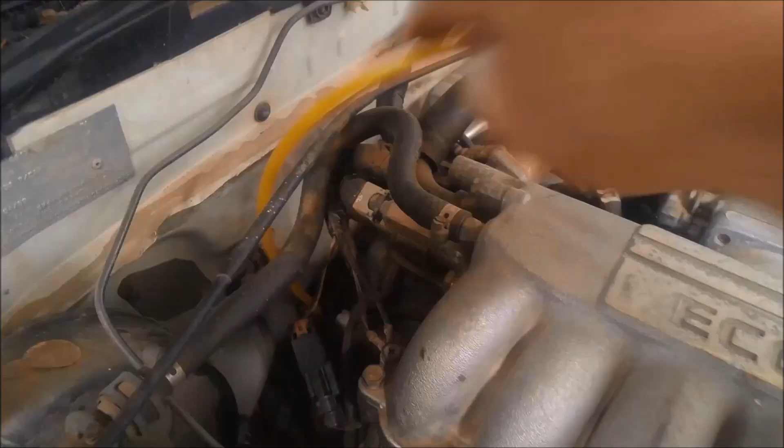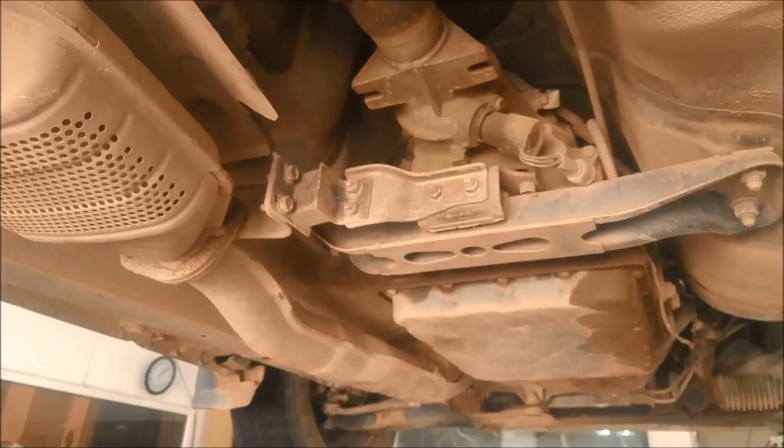So we've just checked all the basics, checked the fluid level, taken it for a run. We'll just suck the fluid out of it. Makes it a little less messy there. Now's a good time to just double check, make sure there are no oil leaks or anything like that. The way you tell if there's a flow of oil there, it'll actually clean a little area wherever it's leaking. You can see it's been weeping oil here somewhere, but it doesn't appear to have any obvious oil leaks.

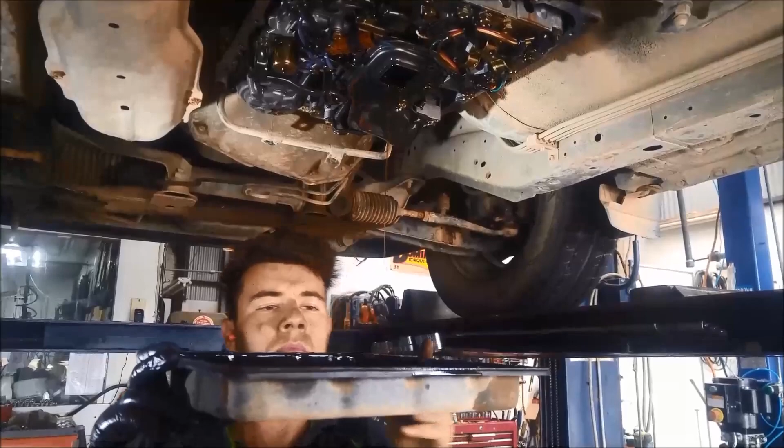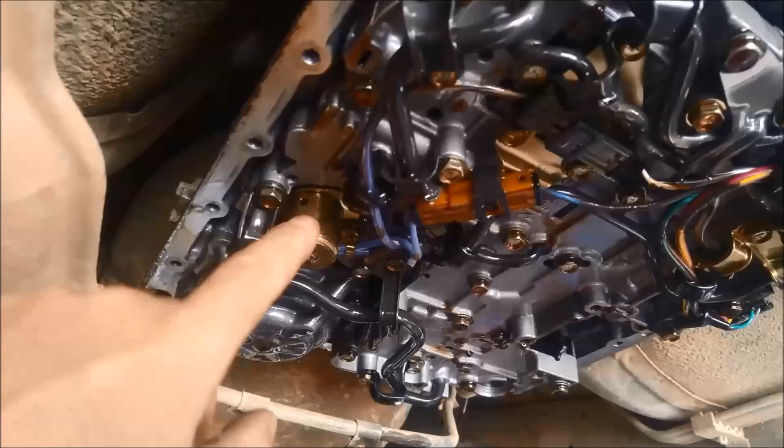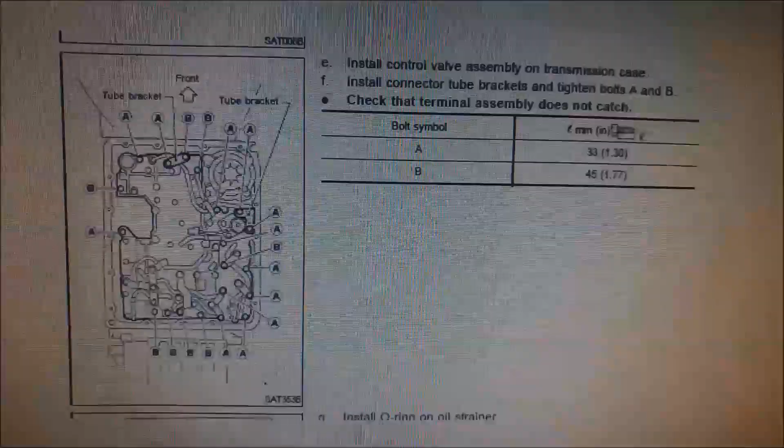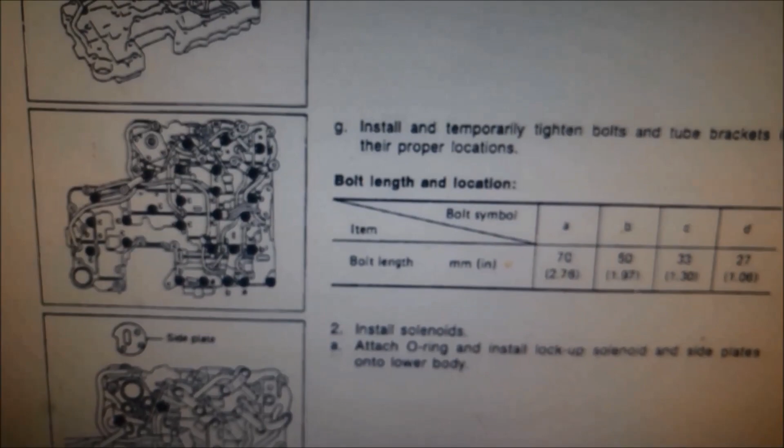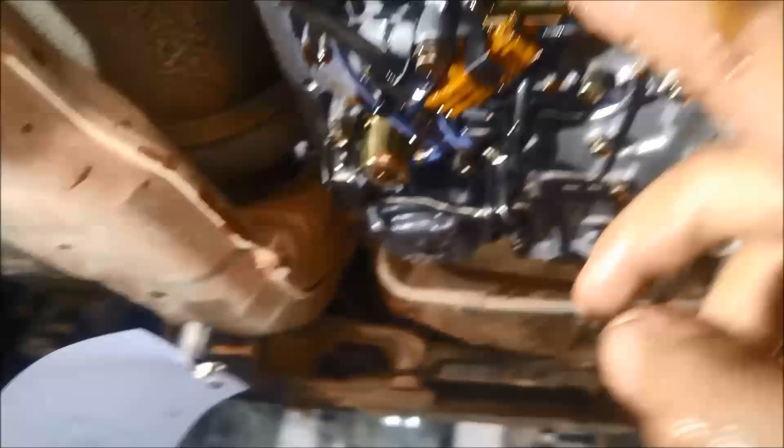Loosen all the bolts as per that diagram, and the way you test it, if I wriggle that valve body up and down, you can see which bolts are not moving up with the valve body. And now we'll just take those bolts out. Well, first we'll unclip these electrical connectors and then we can drop it down. Nice one.

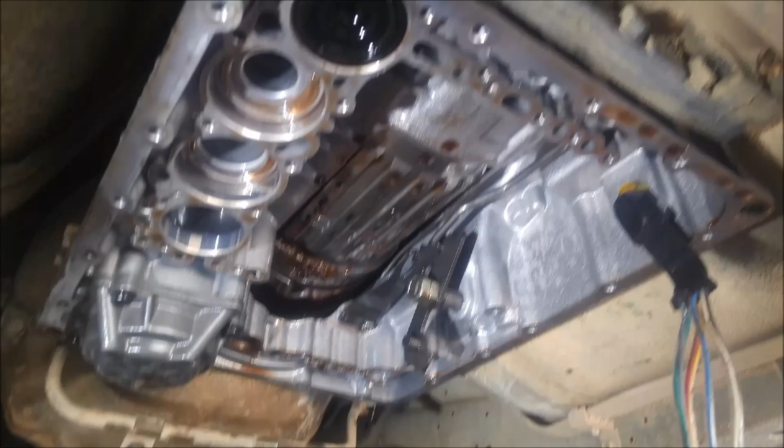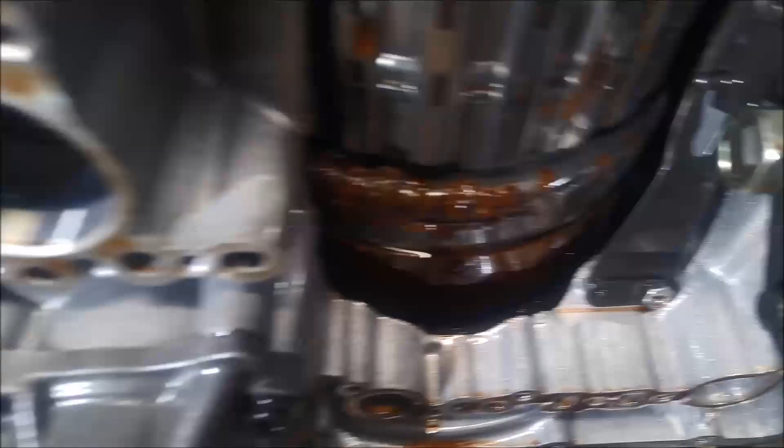Now, as you pull them down, you'll notice we've got these accumulator springs. You've got the front one, then you've got the big one in the middle, and the medium sized heavy spring at the rear. Now while you've got the valve body off, you can do an air pressure test on the clutch packs. You can see this one must have been sitting for a while, and it's got a fair bit of rust on there. That's quite heavy rust, not surface rust, that's actual rust.

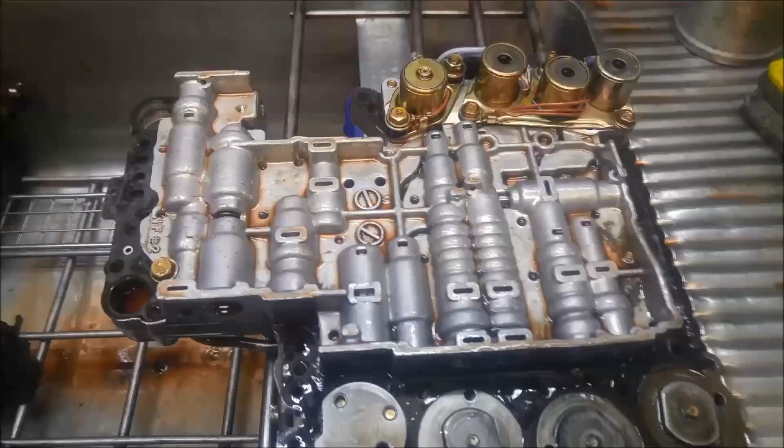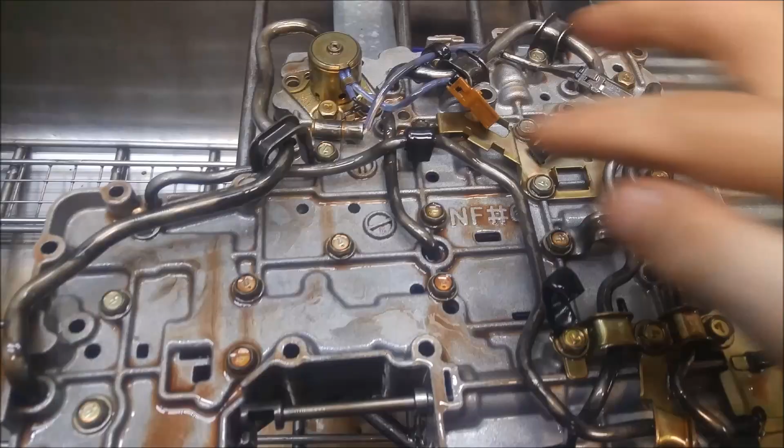So we've got the valve body out, and you can see there's quite a bit of fine metal accumulated there on the top of the valve body. There's the solenoid block. So we've got the overrun solenoid, solenoid A, solenoid B, and the pressure control solenoid. And this one on the bottom side of the valve body, that one's the torque converter clutch solenoid. And we've also got a little temperature sensor here as well.

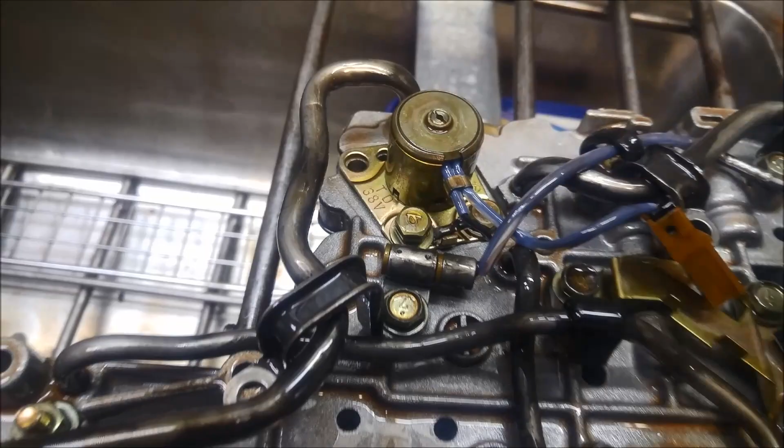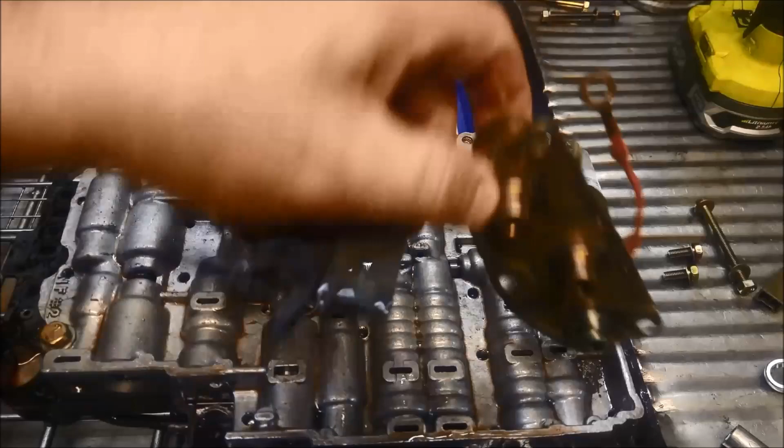The gasket got stuck on the case there when we were taking it out, so we're going to have to actually open this one up and replace that gasket. I'm not sure what that accumulator does there, but you're definitely going to lose a little bit of pressure if you don't replace that, so be aware of that. Always a good idea to check the gasket hasn't got a split or a crack or a broken bit out of it. So I've undone the bolts off the solenoid block, and that just comes away like that. Another bolt on that bracket. There it is there. Now I'm just going to replace that gasket there.

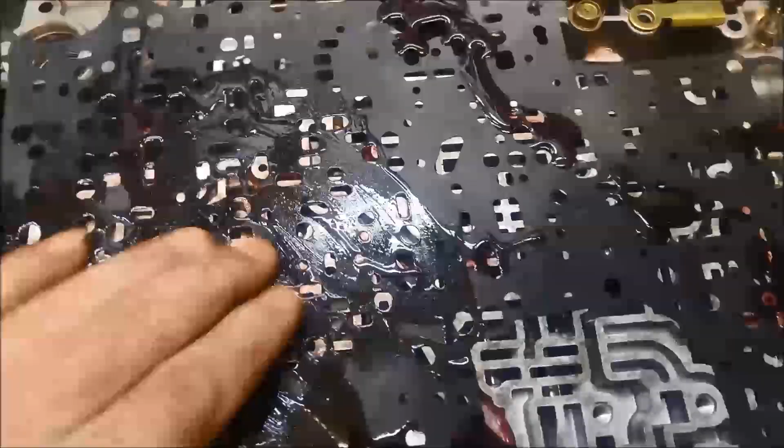Okay, valve body's nice and clean. Check the valves. Make sure you put all the check balls in. There are 9 check balls in these. And I like to smear transmission fluid on the gasket just so it doesn't stick to the valve body before you put it on. Make sure you do both sides. Now we can put the lower half on there and bolt it up.

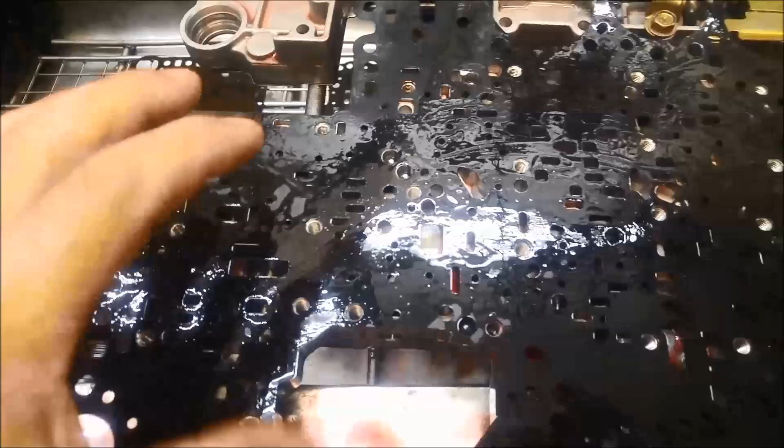One little trick I've learnt, sometimes these valve body gaskets will be larger than the holes. What you can do is just put it in the microwave for a minute. Don't overcook it, you'll burn it, but it will take the moisture out of it and contract it a little bit, especially if the bolt holes and the port holes aren't lined up. The lower half's back on. Now I can just flip it over and we can put our new solenoid pack in.

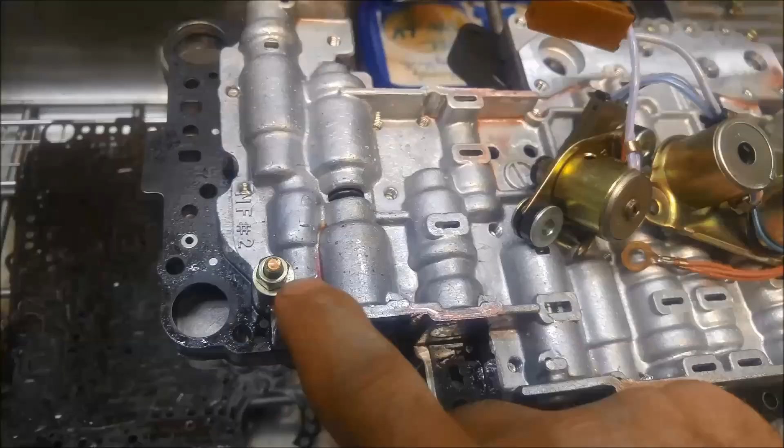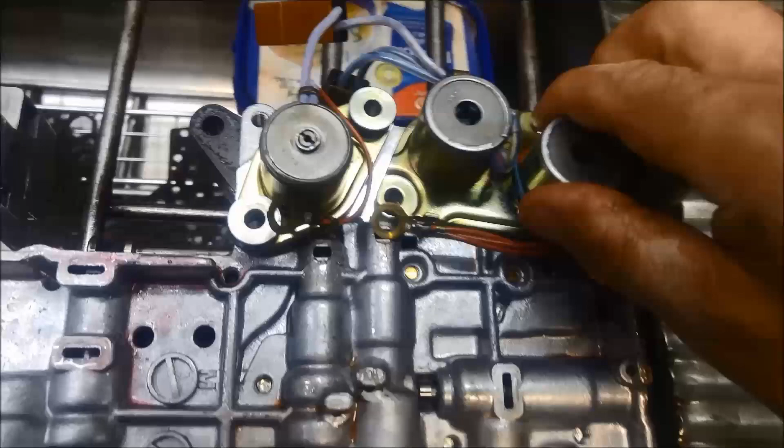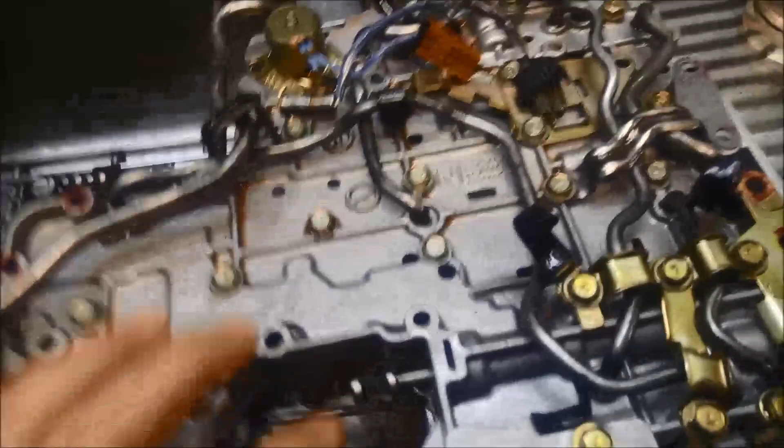Now these 2 bolts, one there and one on the opposite side, they actually align everything. So make sure you keep everything loose until you get these in, and then it should align all the holes, bolts and whatever else. You don't just force it in, just wiggle those seals in. Like that. Make sure your earth strap's bolted down. And also don't forget to line up the selector when you're putting it in.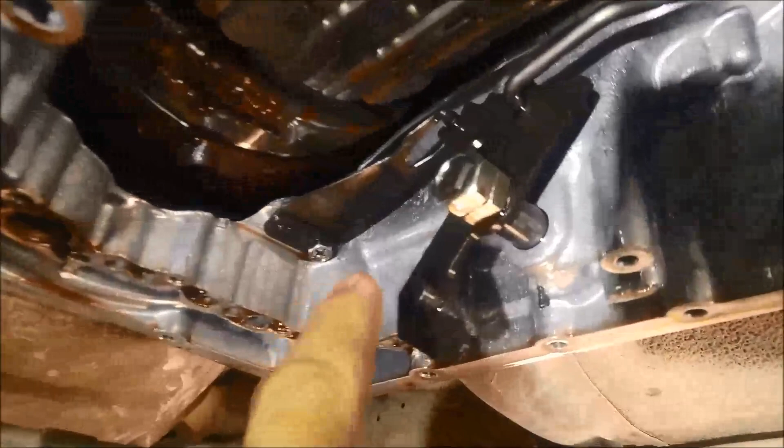I've torqued up the top part of the valve body because we can't get access to the bolts from underneath. Now you want to make sure that the manual shaft is aligned with this. And I'm lucky I've got a helper here. I'll be able to tuck those accumulator springs in there while I'm getting the valve body up. It's very difficult to do, especially on your own, because you've got to align it up evenly.

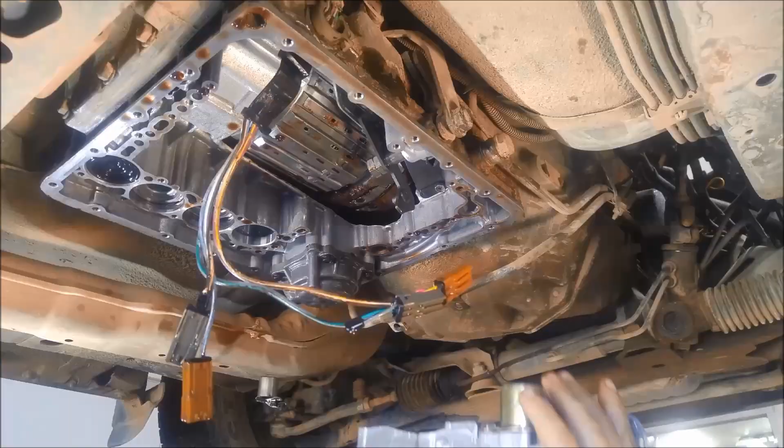Alright, just put it up into place, position. You lined that up. Yep, just lower it down. I've just got to put those springs up. Just sort of twist it like that. You're holding it? Yeah. Just got to go down evenly. Like that, not that much. I'm not moving around because the spring will fall. Yeah, holding it.

Righto, you can just line up that shaft. I've got the springs in. Yeah. That's it. You're holding it? Yeah.

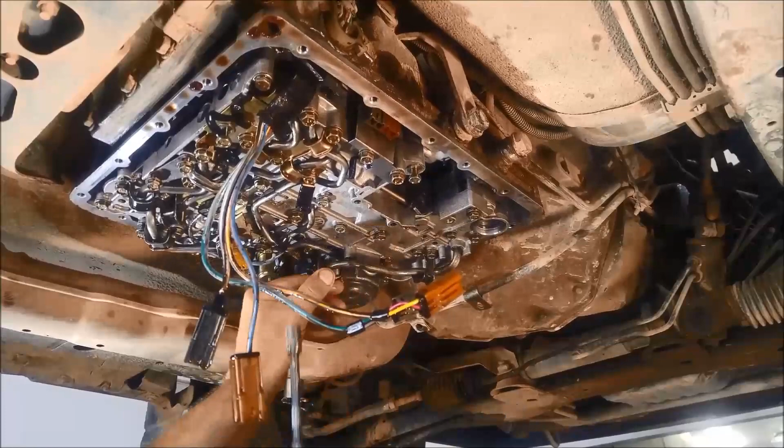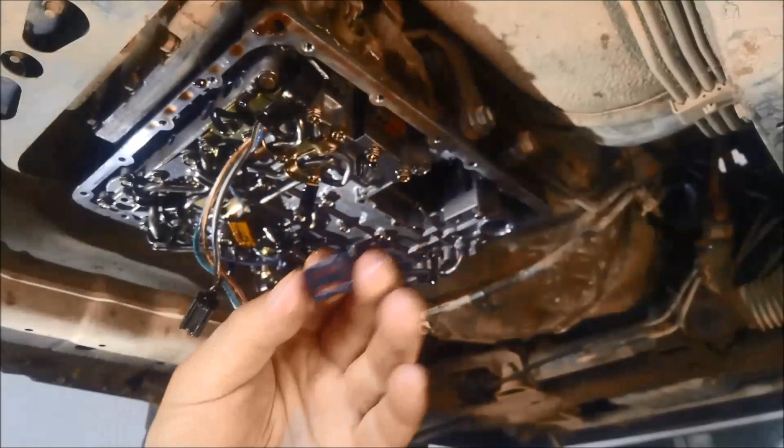Filter goes on that one. Tighten that one up afterwards. And we just torque it up with the tension wrench as per manufacturer's tension specs. Okay, now we can put the clips back in. Got these little clips. They just go over the top of the connector there.

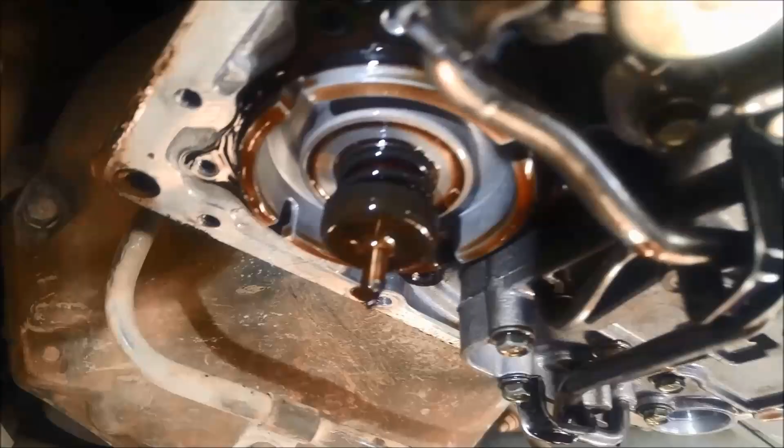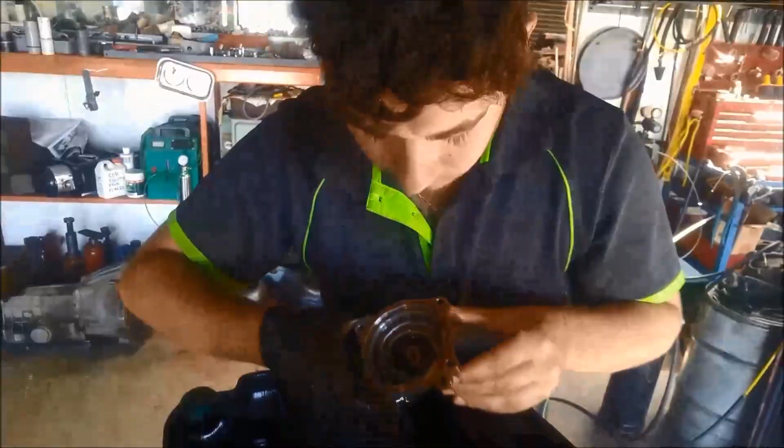And we're just going to remove this cover just so we can clean any muck out of it that might have accumulated. Pull that out. And you can see why it's a good idea to remove that cover, just to wash out or clean out all that muck that's accumulated in there.

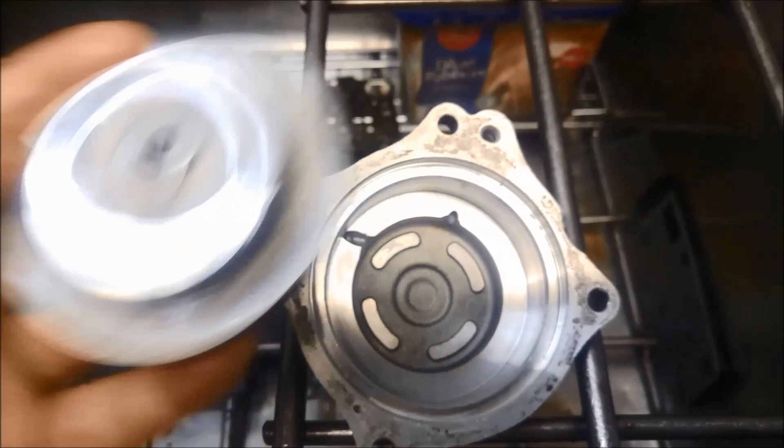So the cover and that top piston, or bottom piston actually, how it sits, nice and clean. And it's a good idea to just smear a bit of oil on there when you're putting it in. That O-ring doesn't look too bad.

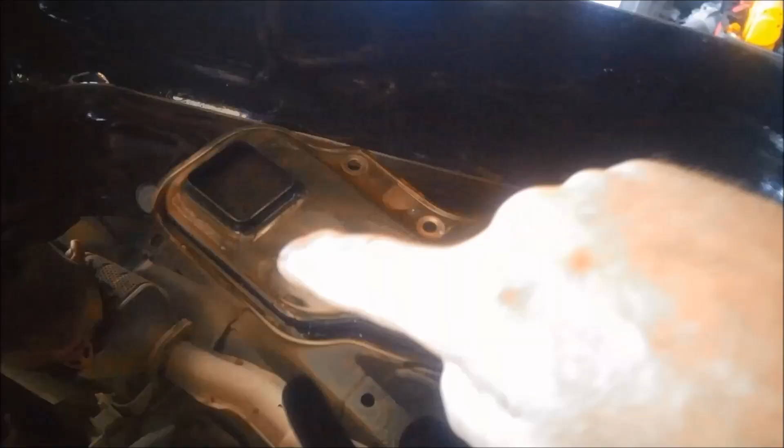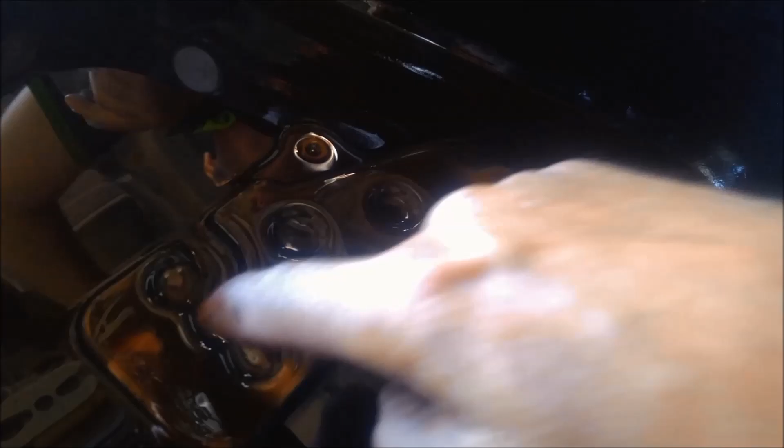Now you can see the snorkel on the filter on these is pretty short, and also the different filters have different numbers of dimples in them. So it's a good idea to compare it, and also don't forget to put your O-ring on the new filter there.

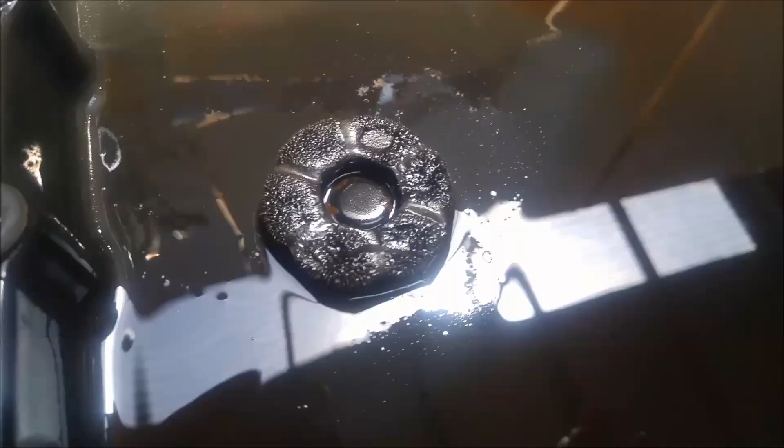You can see how much muck was on that magnet. So the magnet's thoroughly covered. You can see how much fine metal's there, and that wouldn't have been working anymore, so all that muck would have been attracted to the solenoids. One, it contaminates the solenoid. Two, it's suspended in the transmission fluid, and it's almost like liquid sandpaper, if you can imagine that floating through the rest of the transmission.

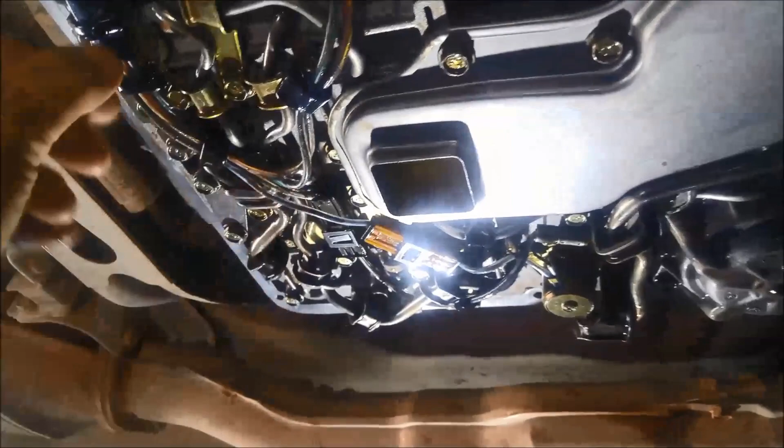So make sure you actually remove the pan, clean the magnet, clean the pan, add magnets if you can, replace the filter, instead of just changing the oil in a transmission service. Filter's back on, everything's back in. Just make sure all these little clips are holding the cables nice and snug. All the clips are in. Double check your work. Make sure your cover, if you've removed the cover there, that you've nipped it back up.

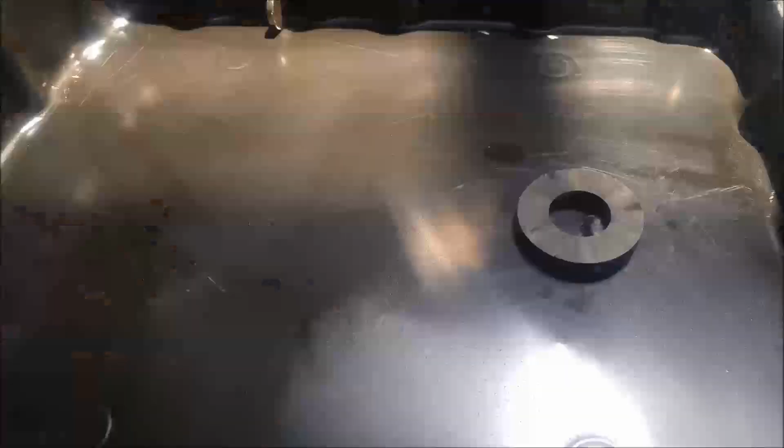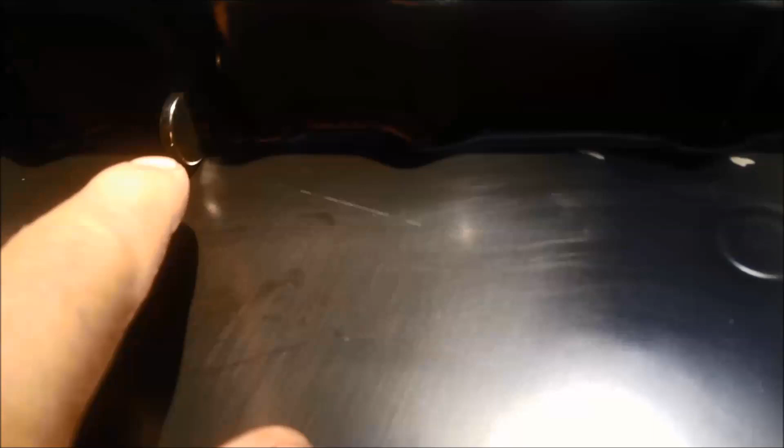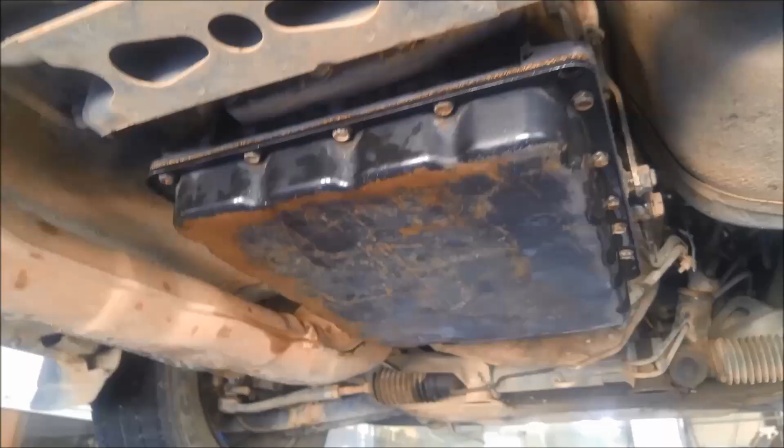We're going to leave the magnet up on that little bump there, just so it can work top and bottom. More of the magnet exposed to the fluid will keep it much cleaner. And we're going to add a neodymium magnet to it as well. Just make sure that it's not in the way of anything. Good idea to test it before you put it all back up. And we'll just straighten out this pan a little bit as well. All back together, pan's back on, new gasket.

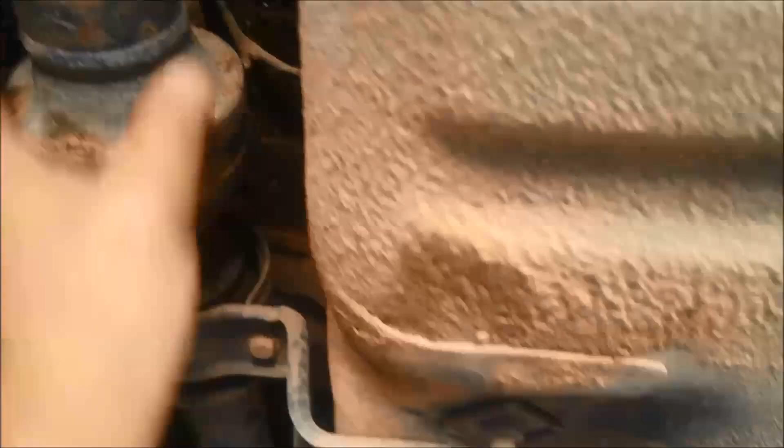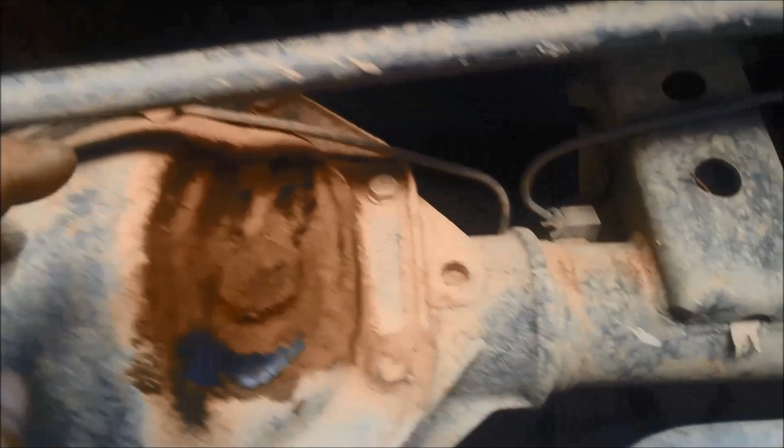While you've got it up, now's a good time to check your universal joints, centre bearing there and the rubber. He's got a bit of a hole in his muffler there. Check all your shocks, rubbers. Good idea to check the diff oil level, and anything else that might be out of the ordinary. You can see he's got a bit of an oil leak over here on that boot. And also a good idea to check those boots that they're not torn or perished. So we're going to put some Tritec full synthetic multi-fluid in this now.

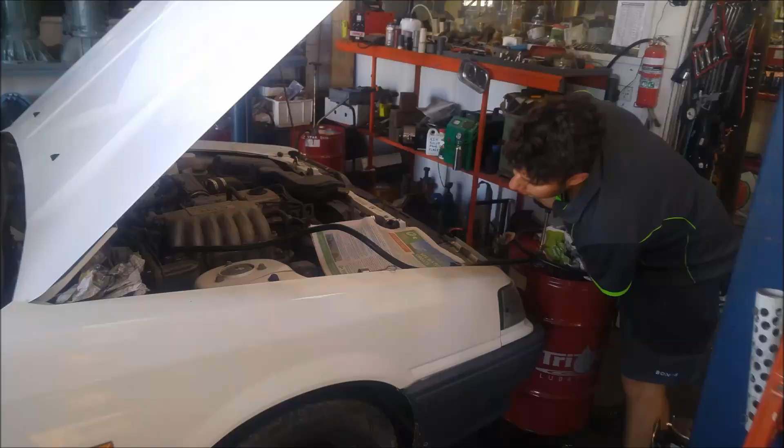There we go, back from a road test. It's not jumping in and out of gear. I've had it warmed right up. We did a couple of stall tests, and that'll warm the fluid temperature right up. And also what I've noticed now, whenever you select the power shift button, it'll even select in and out even up to 50 or above 50 kilometers an hour.

There is a bit of a firm 1-2 shift, and 3 to 4 is very soft, and the lock-up you can barely feel it, but you can see it on the tacho there. It'll just drop down in revs by about 200 to 300 revs. Anyway, I hope that's helped. It is a complicated valve body to get off because of all the bolts and brackets and things, but you can do it if you're patient. And good idea to take photos of what you're doing just as a reference how to put things back.